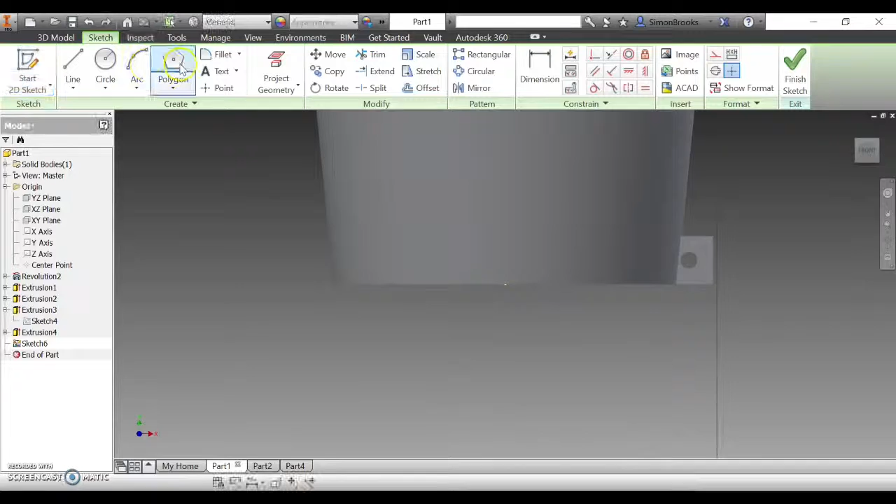Now we're about to add the hex cutout to the bottom tab. I just want to show you one problem that you might run into if you try to do this in a similar design. So to do this, we're just going to show you the steps again. So click on the surface. Same as before, we're going to add the hex shape. Hover over the circle, find the center, and then drag out that hex shape.

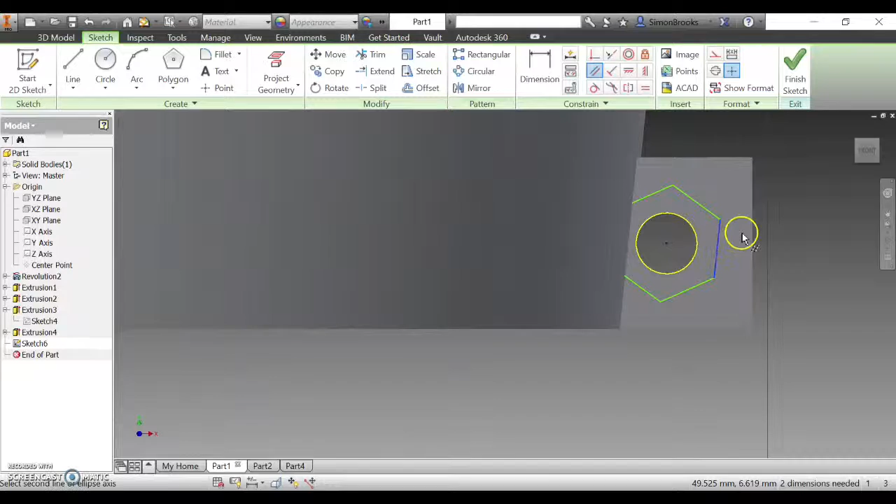Now what you might notice already is that hex shape is going to cut into our revolve profile. So there's two things you can do to do this. We'll just go ahead and drop it down, and we'll do our parallel constraint again to straighten it up. You could straighten it with this line in here to give you a little bit more space, but just for this example we'll do this, and then we'll add the dimension, which was 7mm before.

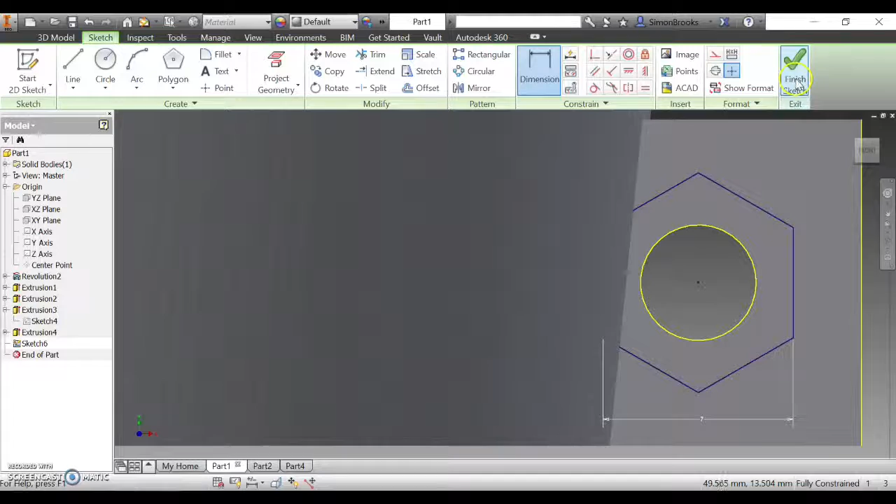So you can see once I've done this, that in this shape here, part of the hex is actually behind the revolve. So the first way you can do that is to continue on and finish the sketch, and then do the extrude. Now if I do what we did before and just cut it back, you'll see that it's going to leave a flat edge just here.

Now this is where we need to use this little tool just here, the asymmetric tool. So what we can do is tell it to cut one direction a certain distance, and then another distance the other way. Alright, so I'm going to change this one here to show you which way that's going. So that's the original cutout, so the first distance is what we cut out previously, and then the other way here is going to cut the hex out of that revolve,

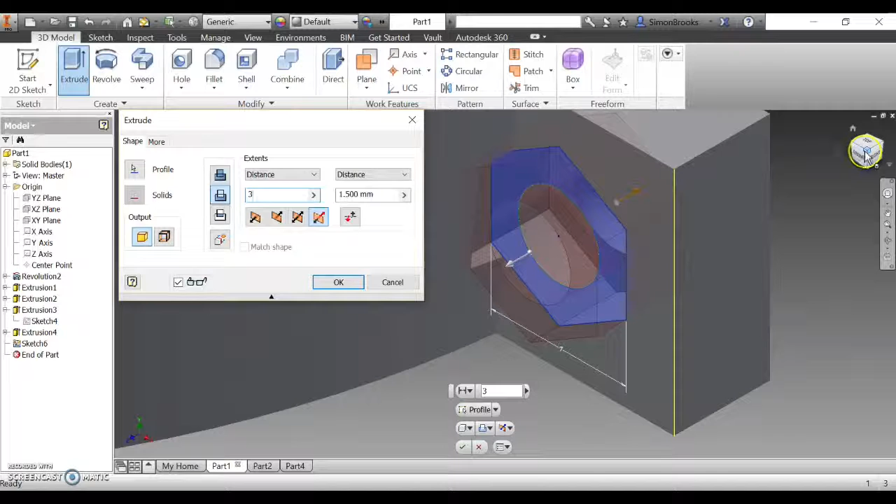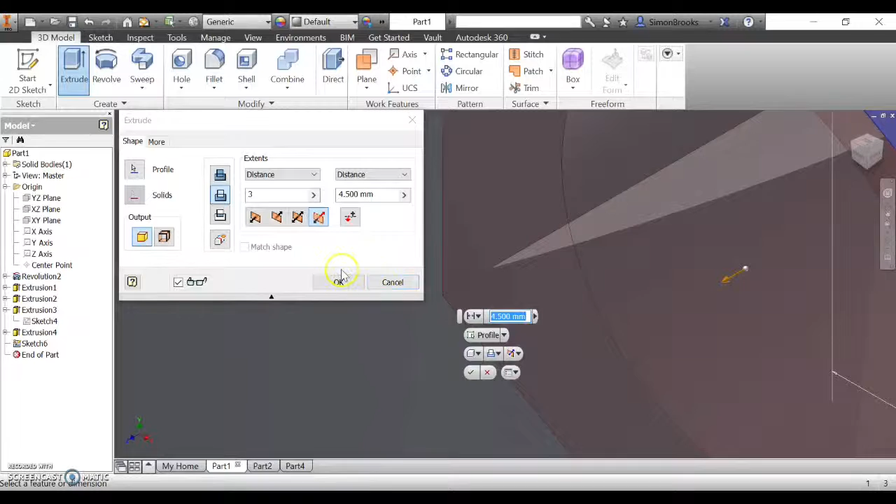so that way it's going to allow the nut to actually fit in. It doesn't really matter how far we drag this out, as long as it's actually cutting out the shape. So you can probably see if I keep dragging that, once that's out, you'll see a little point just there, so that means that it's cut out enough so that we can slide that little nut in eventually. So I'm going to hit OK there.

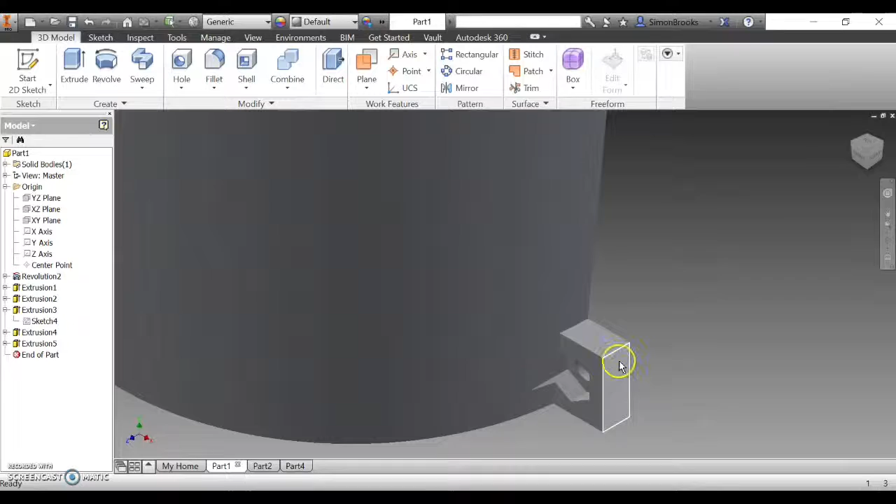I'll come back out, and you can sort of see that if we go straight on, you can probably see a little cutout just there, like so. So that's how you can fix that one way. The other way is that you could just extend that tab out a little bit, and I'll just show you that now. So I'll just go back one step.

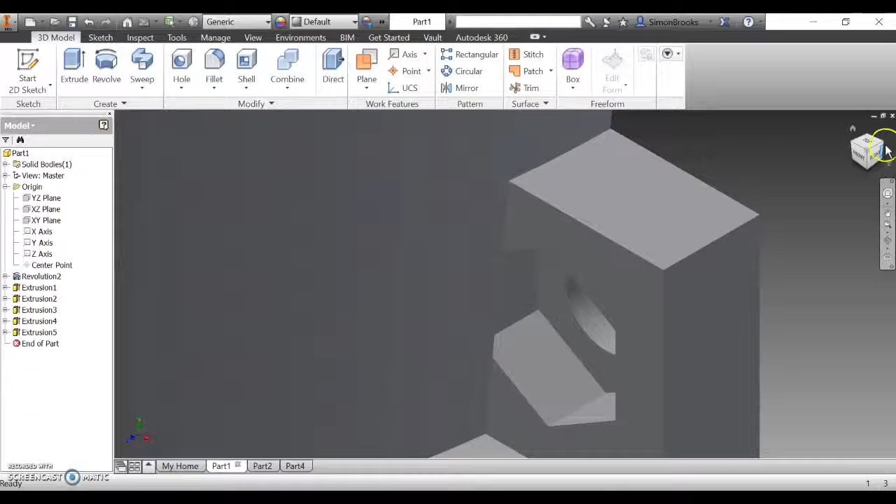We might leave that there, and we're just going to extrude that as we did up the top, and cut that. So hopefully now you can sort of see what I'm talking about. If I maybe come around this side and try and zoom in a little bit, you might be able to see a little lip. If we zoom in there, that would stop the nuts from sliding in. So with this method, we're just going to lengthen that tab out slightly.

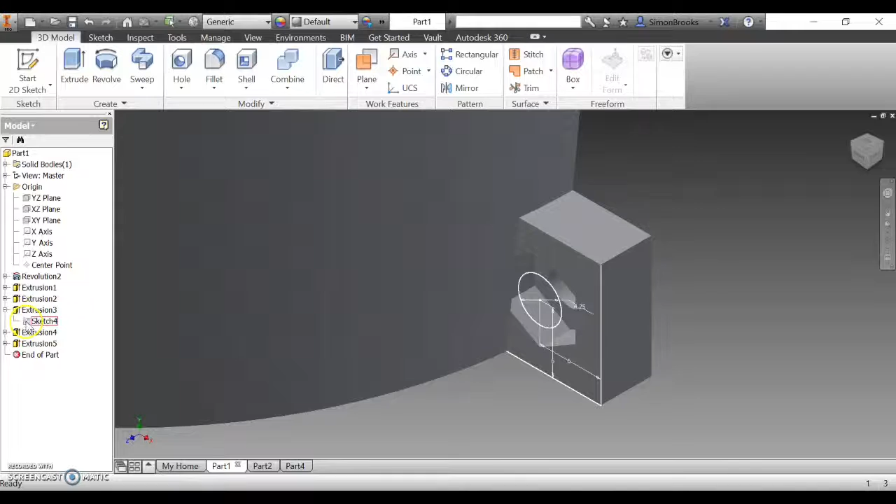So we'll go hover over our sketch, which I think is this one here. Just double click on that one. Oh, no, sorry, that's the circle. We'll go back. So it must be that one just there. There it is. So we'll double click on that one, and rather than making that 12, we're going to lengthen it from left to right, so we're just going to make that 15, for example,

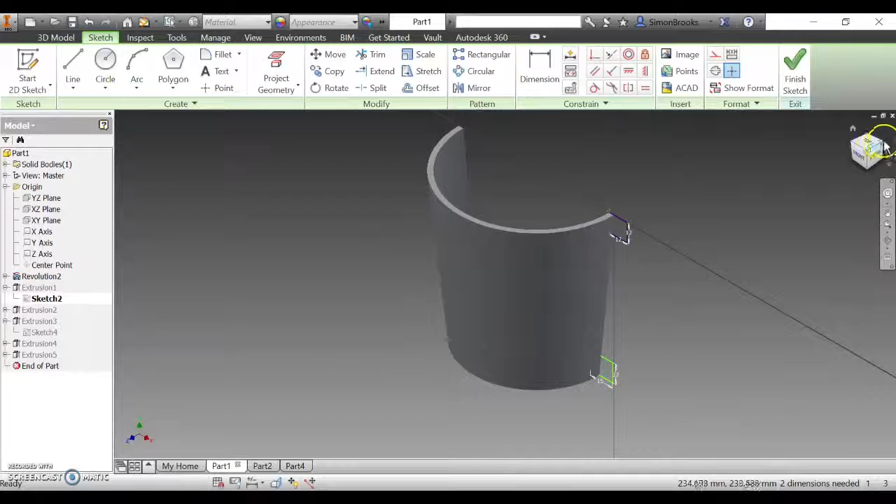and then hit OK. Which way has that gone? It's gone the other way. Bear with us 2 seconds. We'll just bring that back into here, and we'll make that 0. There we go. That's the shape that we want. So we just lengthen that tab out slightly, and there we have it.

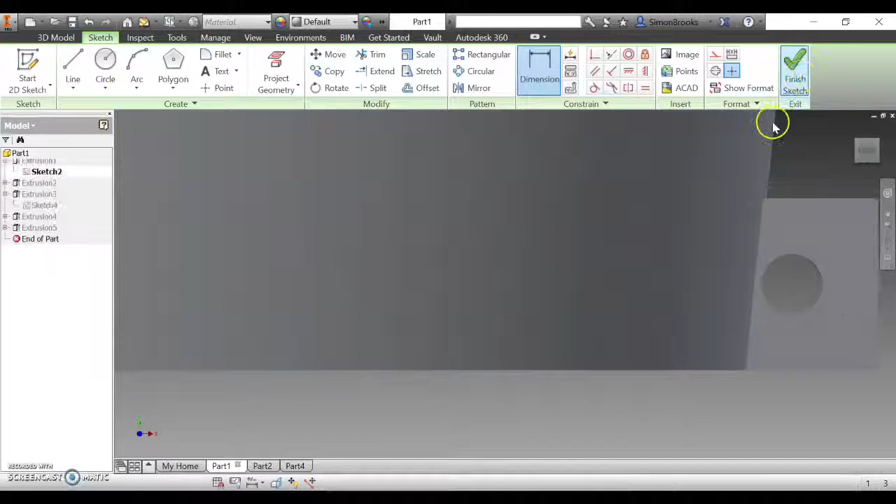That's another way that you can just make sure that that hex has got clearance so that you can eventually nut and bolt these two molds together. So there's a few tips that you can possibly use if you run into trouble doing that step.